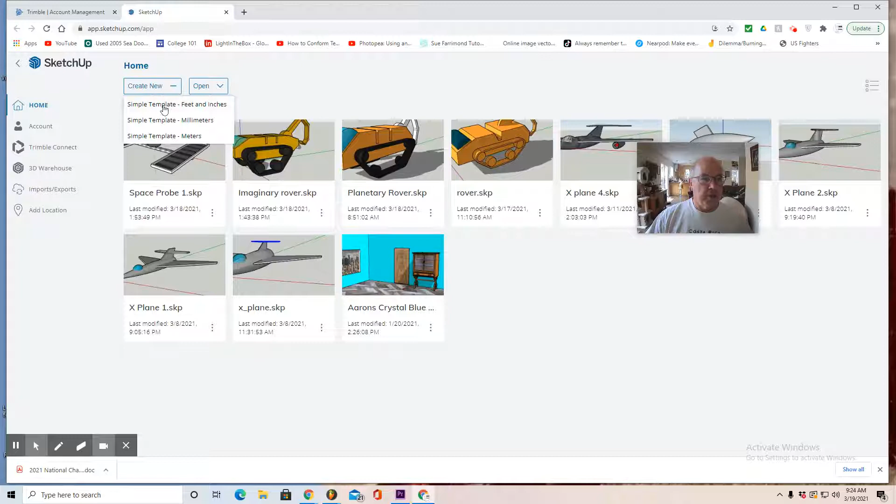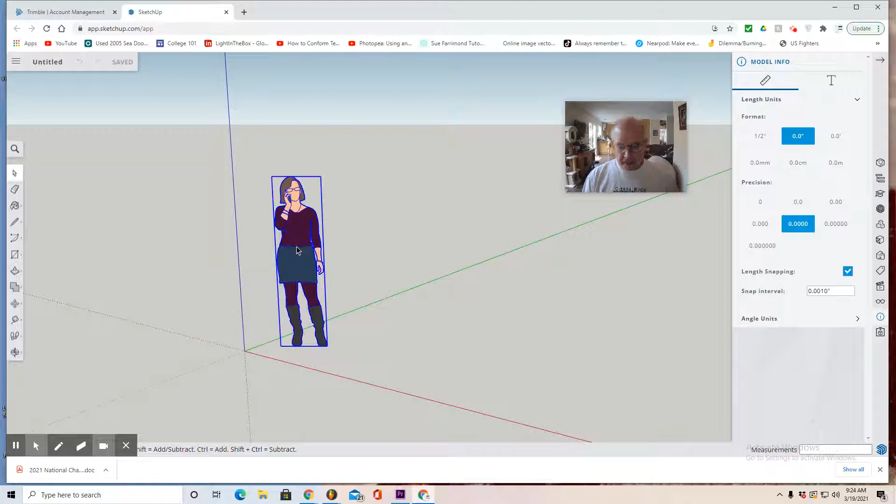Step 2, go to the I for model information and make sure you put it in decimals. Leave the precision as it is and change the snap interval to 0.001, then hit the enter key to lock it in. Select the 5'8" lady and hit the delete key on your keyboard to remove her.

Go to the scenes tab, looks like a movie clipboard. Put it in parallel projection to model, then put it in front view. Use the pan tool in the bottom left to grab that hand and pull it right here. Here's your origin, and then pull these axes down to the lower left.

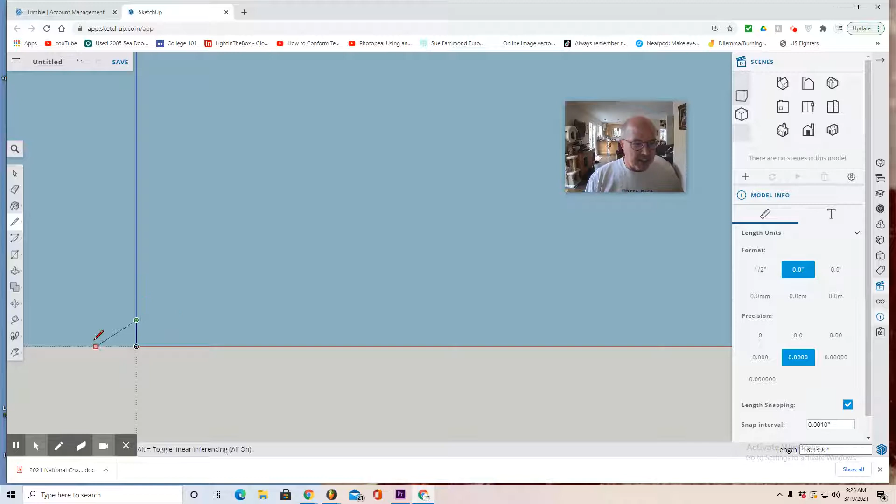I'm going to start with about a 10-inch central axis line. Looking down to length in the bottom right, I see my pencil still on the blue axis, so I'm just going to enter 10 on my keypad and hit enter. That locked in a 10-inch line. Use your mouse wheel to zoom and scroll in.

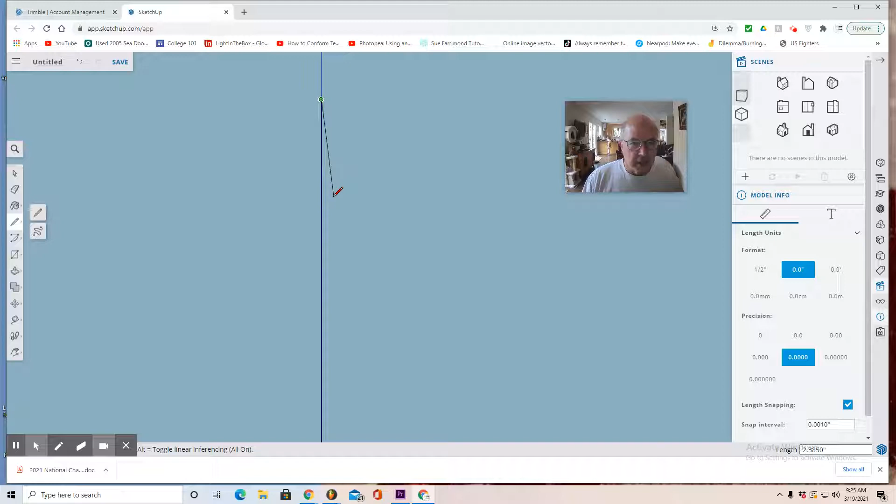Now I'm going to create my profile, adjusting it with the pan tool, then back to the line tool. Invariably, I use the double satellite dish. What I'm going to do is create a cone here, then hit escape.

Now I'm going to go to the arc tool, start here and pull my pencil up somewhere in this area, click, and pull an arc which will eventually become a satellite dish, then click. Now I'm going to try it again, but try to make it approximately parallel in nature, so I'll bring it here, click, and pull it here, click.

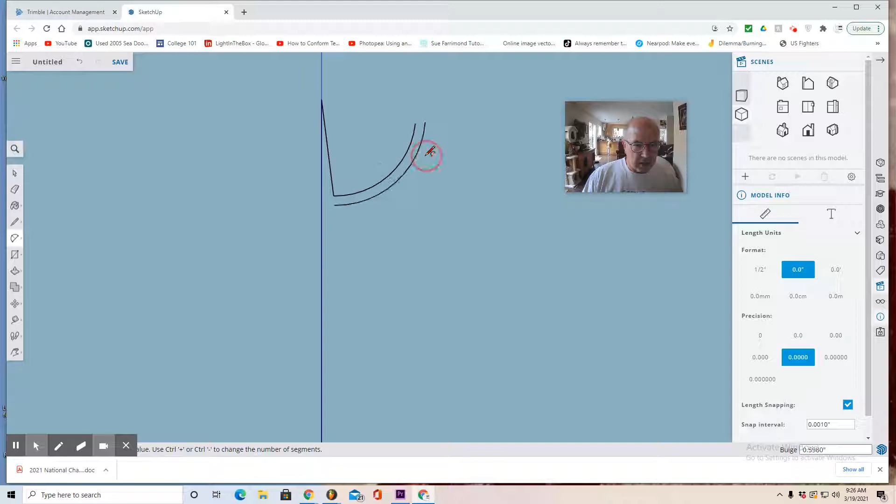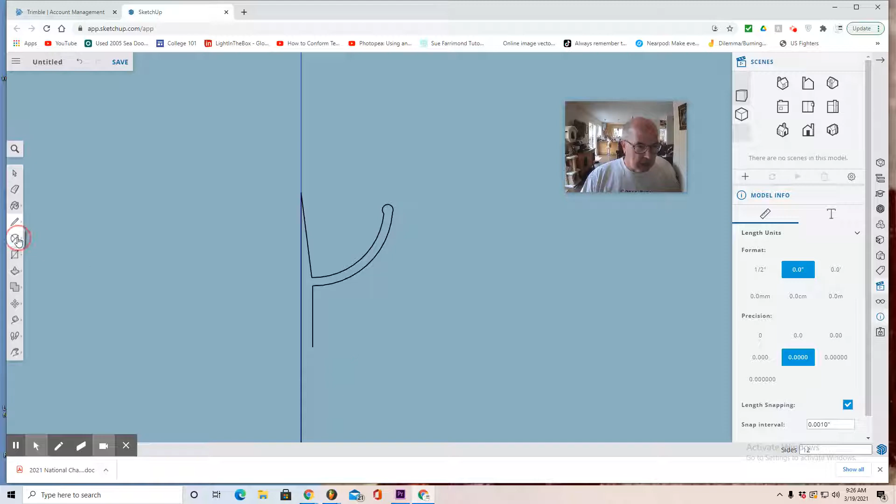For detail, let's zoom right in. I'm going to select here and make a bulbous detail shape. Now I'm going to use the line tool and move straight down, click a short little line, hit escape. Now I move to the arc tool yet again and make an even bigger disc.

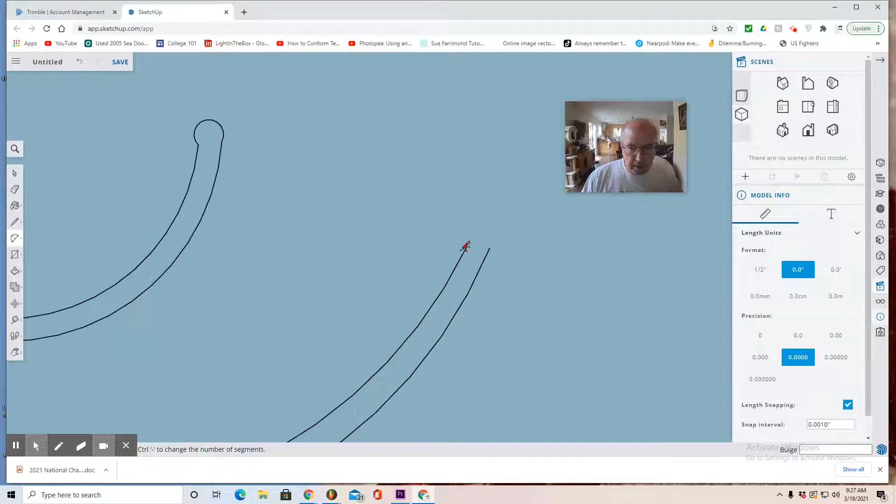So I'm going to make it just a little larger than the original satellite dish, and again pull a parallel arc. Then again zoom in, select once and select twice, and then pull and enlarge a bulbous shape.

Now I'm going to pan to see more. This is the main body structure, where all the electronic components will be stored in your satellite dish. You can add details as well, make it really nice if you add some little details inside.

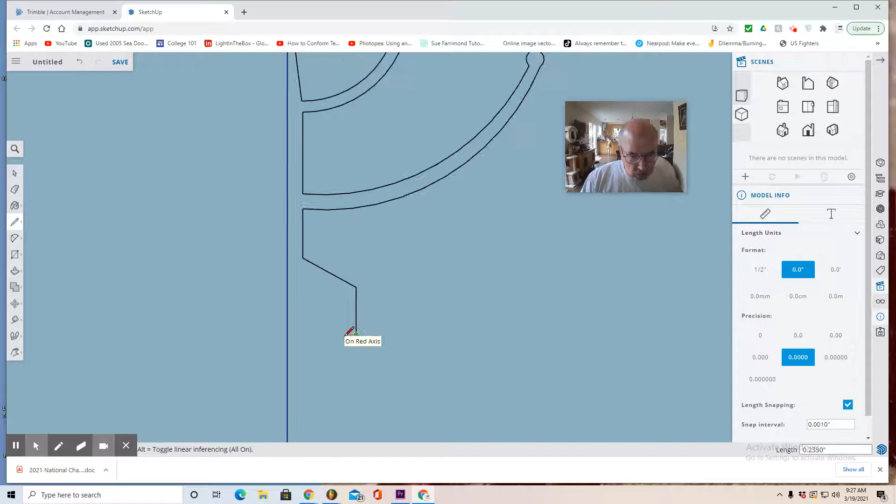Now, these are just imaginary, but remember, the concepts are real. In here, we have the electronic components. And remember, you can stop and pan at any time, then select the pencil again and return.

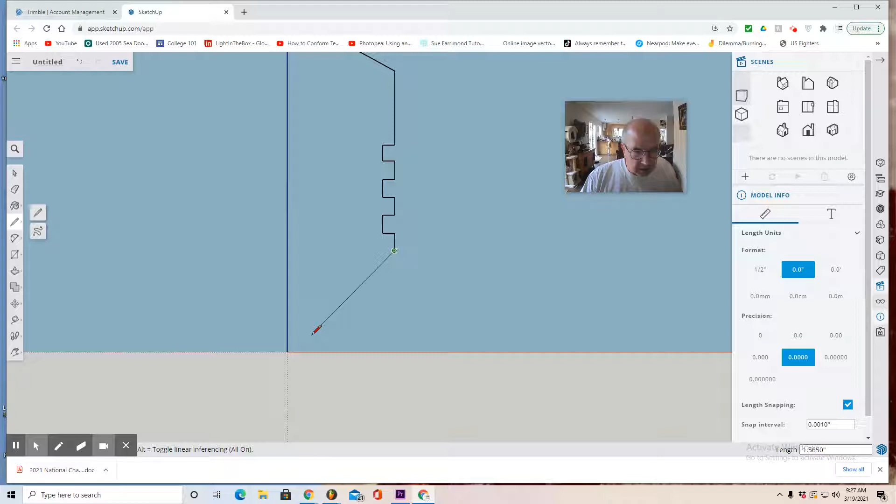I'm going to hit the escape key and try something a little different here. Maybe put an arc here to here. Who knows what this looks like? All right, so we got that.

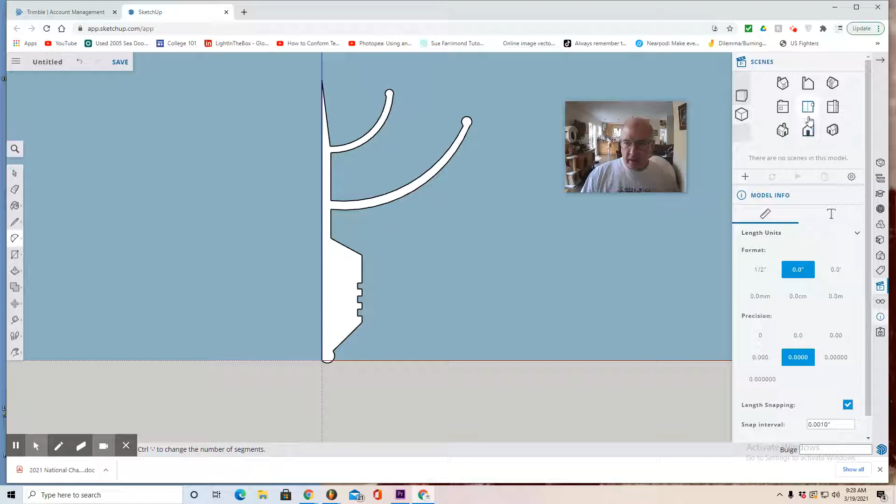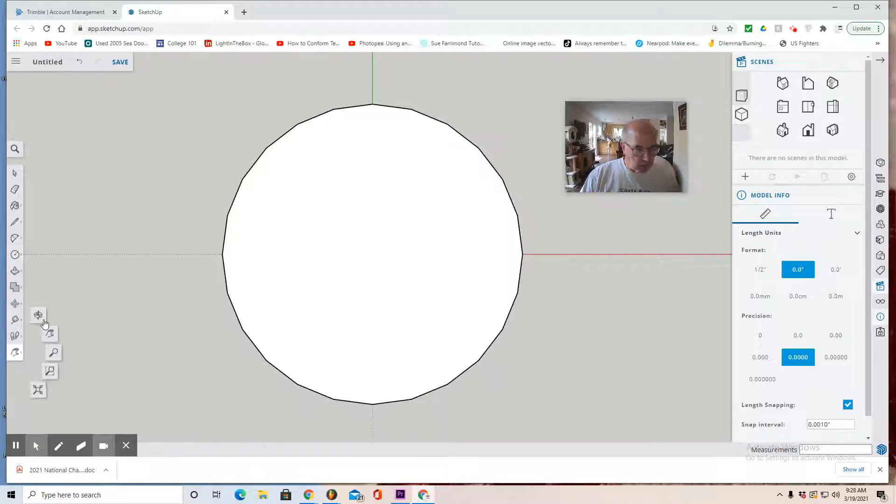Now that I've got the shape, I'm going to put it in top view. I believe top view would be nice, and make a circle. You can see my profile is slicing right through, and I'm going to use the circle to do a follow me process. Select here, select here, and then use the orbit tool to verify I did that correctly. As I can see, I believe I did that correctly.

Put it in front view if you so choose. Check it out, all right. So now I'm going to use the follow me tool. It's right under the push pull tool, the second tool down. First, you'll select your profile.

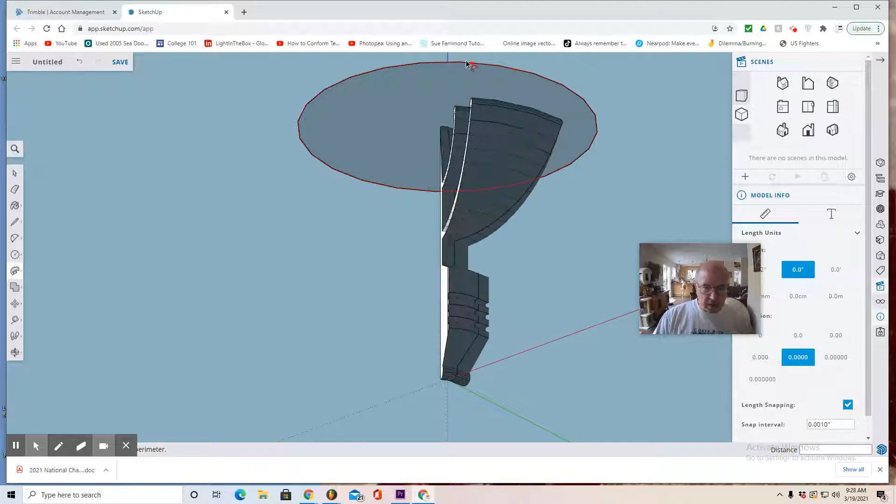In this case, I am going to pull it all the way around until I get back to here, and then click. And it worked out. Now, if it didn't work out perfectly, look, it doesn't seem like it did, so it actually is a nice little effect. Control Z though, I'm going to try it again. So again, click, and then up here.

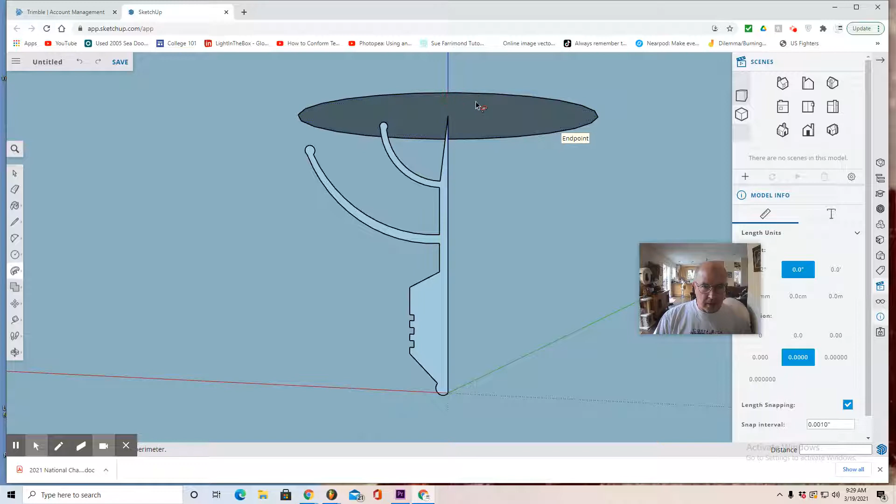Let's just reset the orbit a little. Follow me here. Again, bring it all the way around.

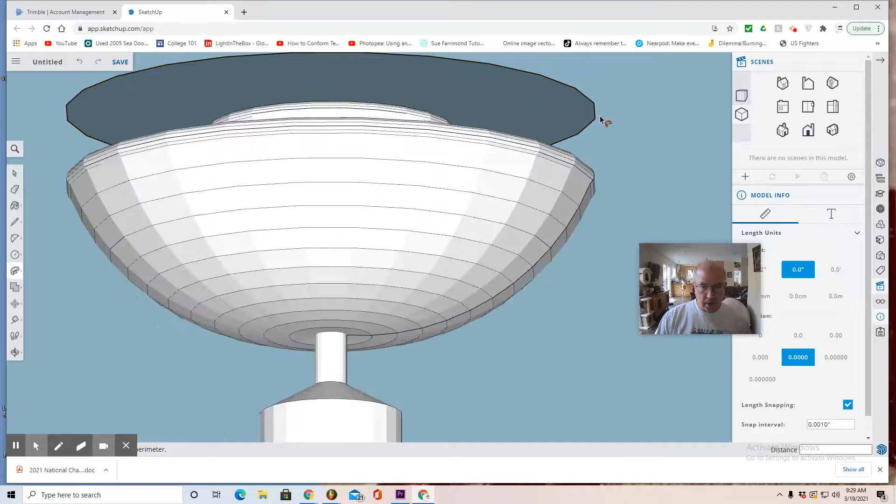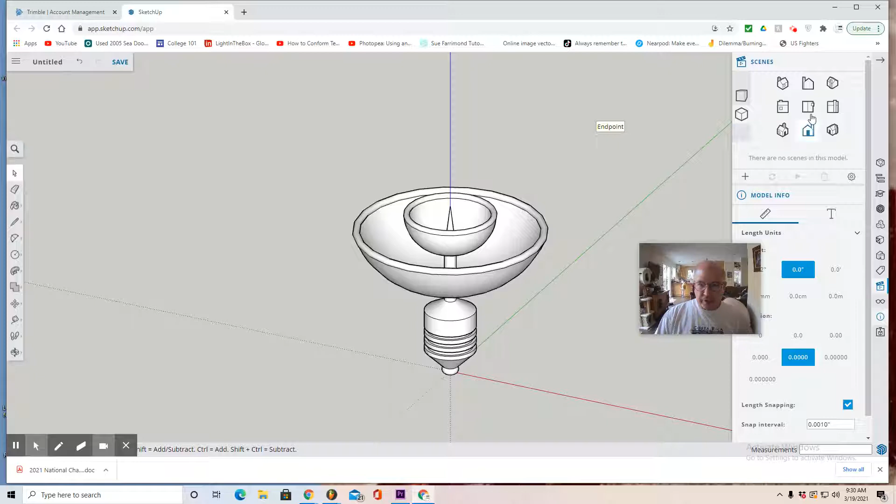I was able to successfully create a complete revolution. Now I'm going to select the disk and hit delete. So far, so good. That's the main body of my satellite.

The next step: put it in top view, zoom out, pan, and pull with the hand tool. Use the hand to pull way over to the right.

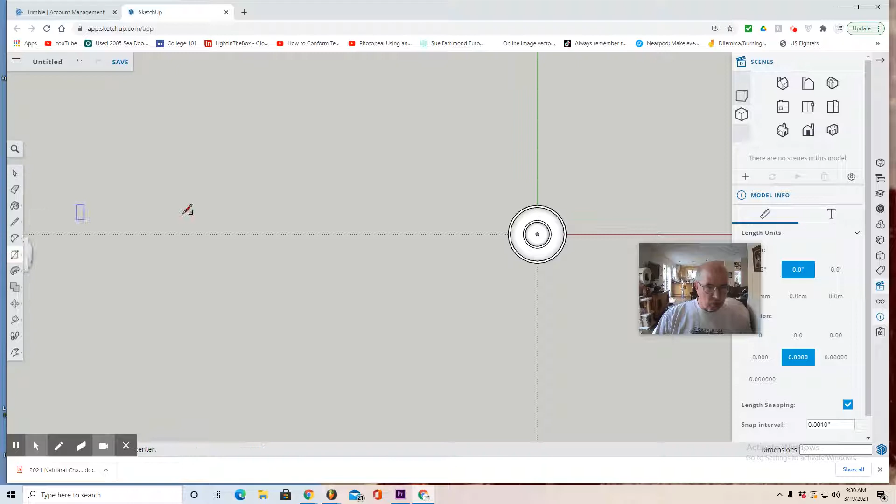Now I'm going to go to the rectangle tool and make my solar panels. Here's a solar panel. Click, and I'll make one that looks proportionally okay. Then you can use the orbit tool to push pull.

Just a thin shape, maybe 0.2. Enter. Okay, that's my solar panel. It's got to be lightweight.

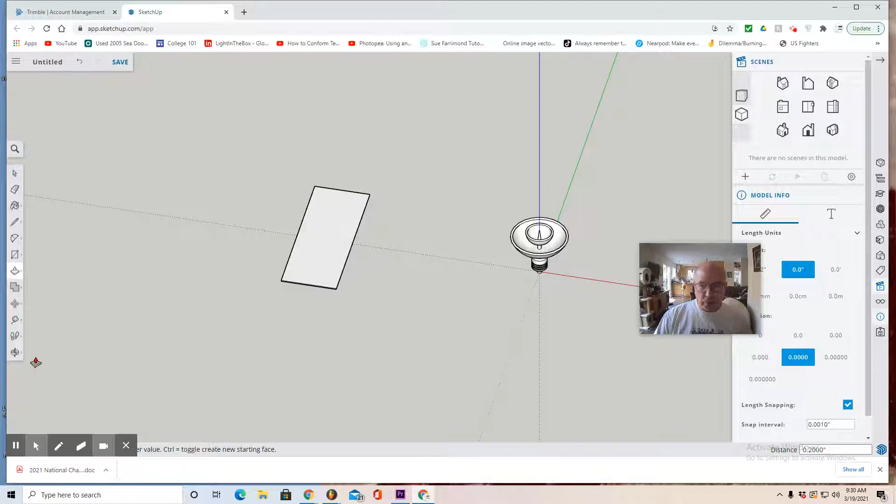Now here's an opportunity to use the offset tool that we used at the very beginning of the year. So I select my shape and press outward until I get approximately there. Now I'll use the push-pull tool again to grab this and pull it up a little bit, about 0.1. There, just a little detail.

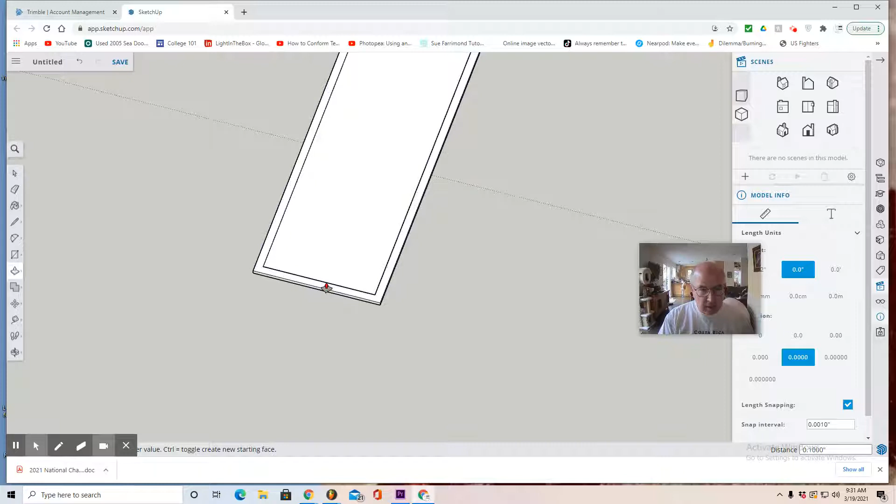Top view. The next step would be to copy the whole thing. Go Control C, Control V. You can use the pan tool and the move tool to move it onto the other side. Select this one and use the move tool to move it to this side.

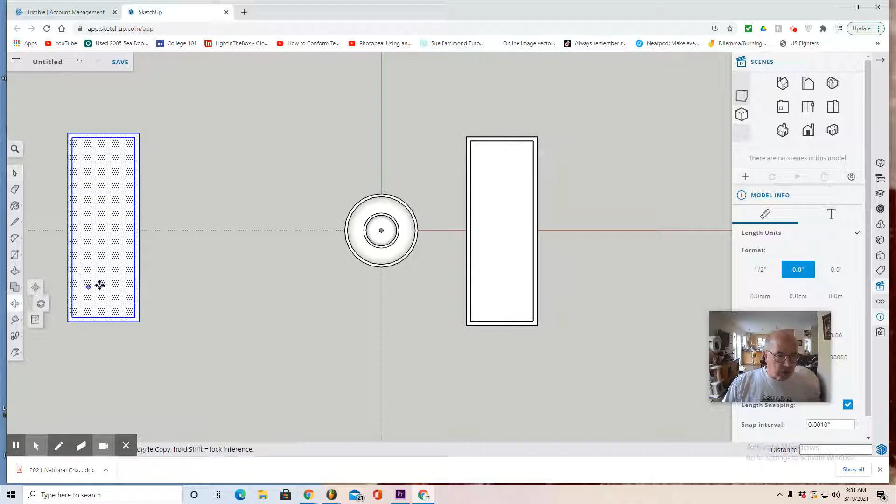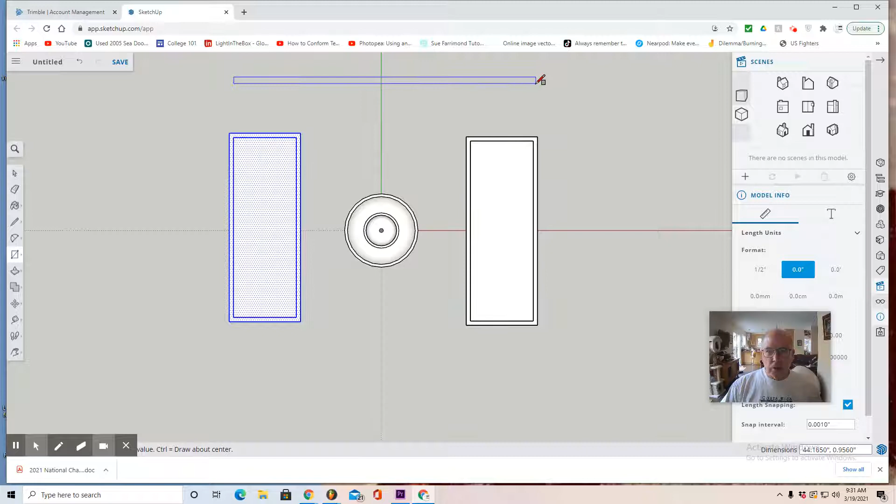One more component: again from the top view, make a rectangular bar. You can start here, just a thin rectangular bar. It's your world. Click, then use the pan or orbit tool and the push-pull tool to make a thin bar, maybe about 1 inch.

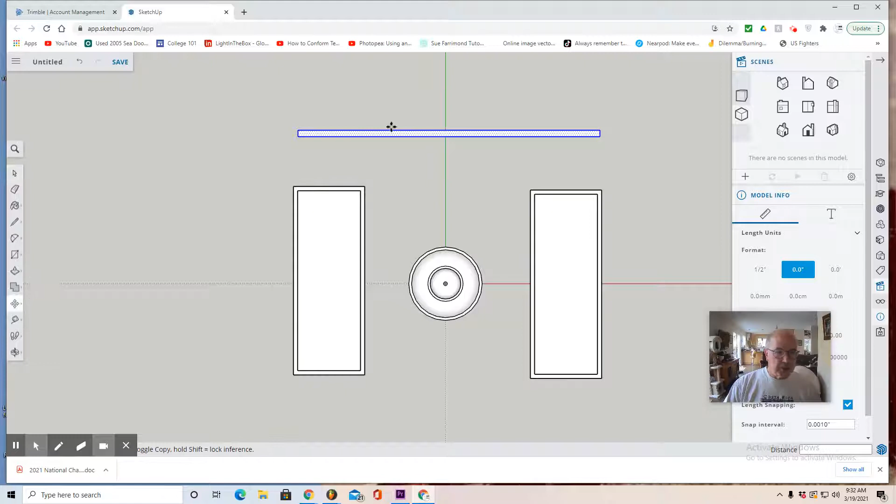Right, top view. Make sure you select it and move it into position. It goes right through the center of your satellite. Look at it from right view because it's not in the proper space.

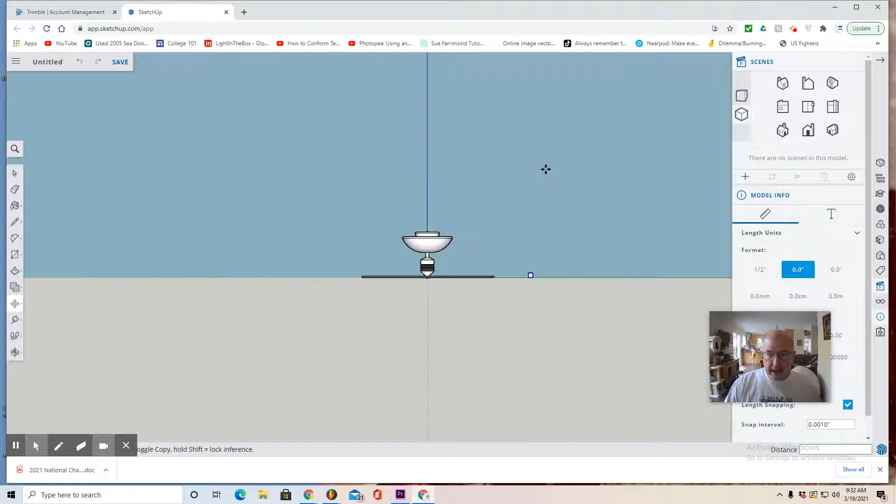Control Z, because I'm going to move it down first. Actually, I'm going to run it right through there, like so. That's where it goes, right there.

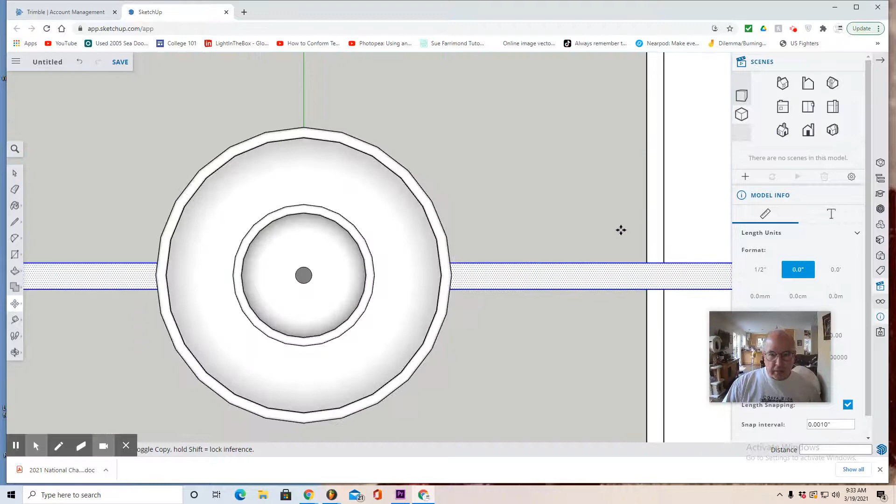Okay, top view, and now actually grab my panels. Make sure you grab them from the top. See if it's possible. Look at it from right view. Move it up. Doesn't work - Control Z. You have to look at it from front view to select it properly.

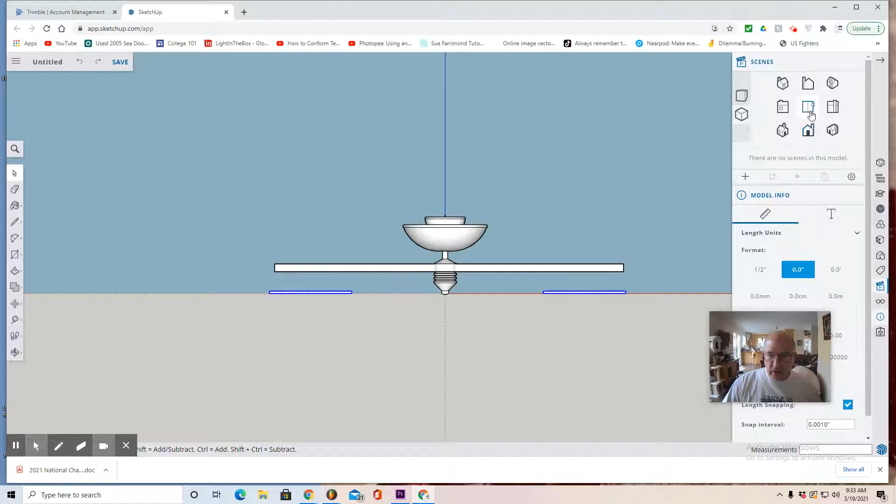Select it. Can you hold the shift key? Select this as well. Now you can look at it from front view. Let's see, top, front, right - try to find the appropriate view. Bring it up. There.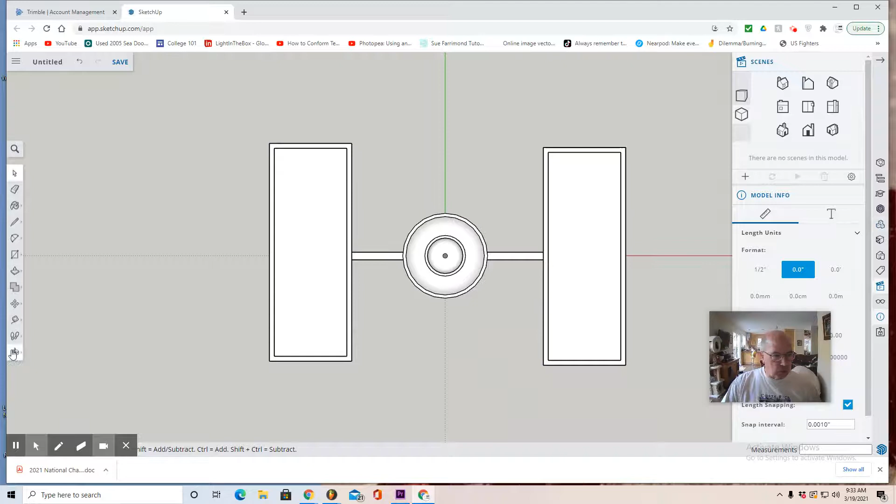Now it's all about discovering which materials look nice for carbon fiber and for solar panels. So step one, go to the materials list, look for colors, possibly metal, something with... ooh, could be solar - maybe this one. Yeah, maybe this. Just experiment.

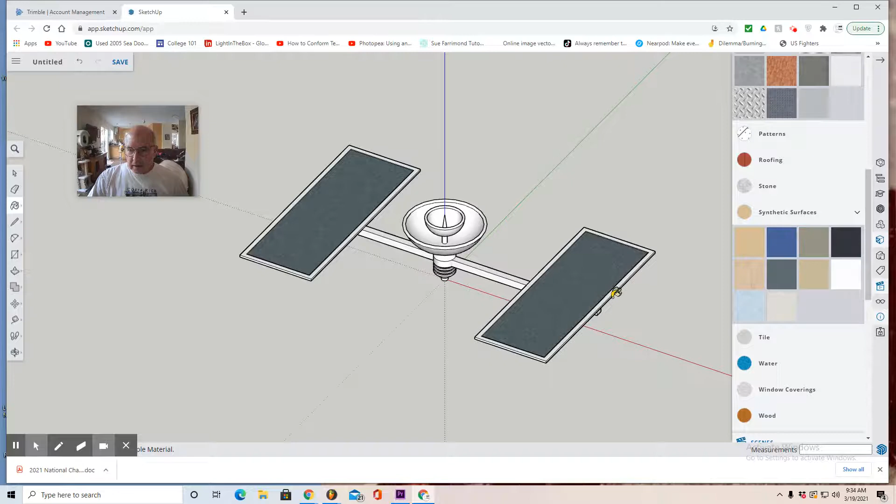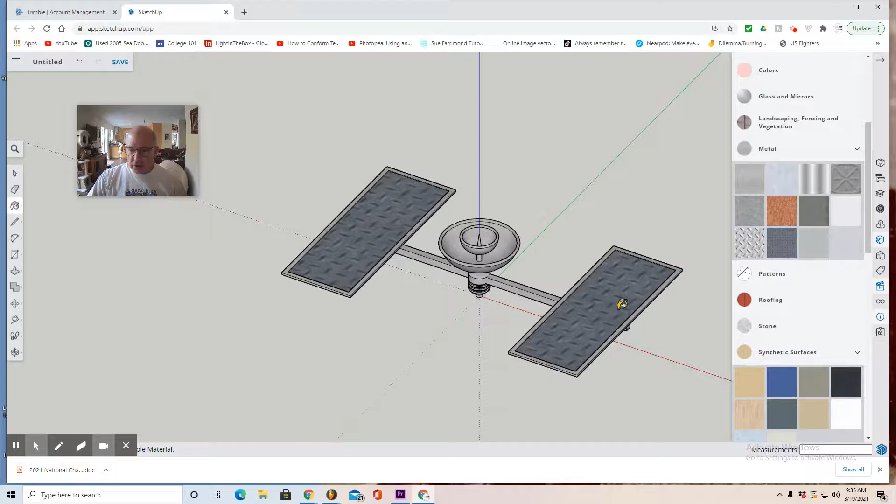So with that said, what I'd like to do is create the entire thing as a metal. I want to select the entire object. Now I'm going to go back to my solar panels and just select these two. Actually, just use this - there we go. That looks like a solar panel. Now to go to the final process.

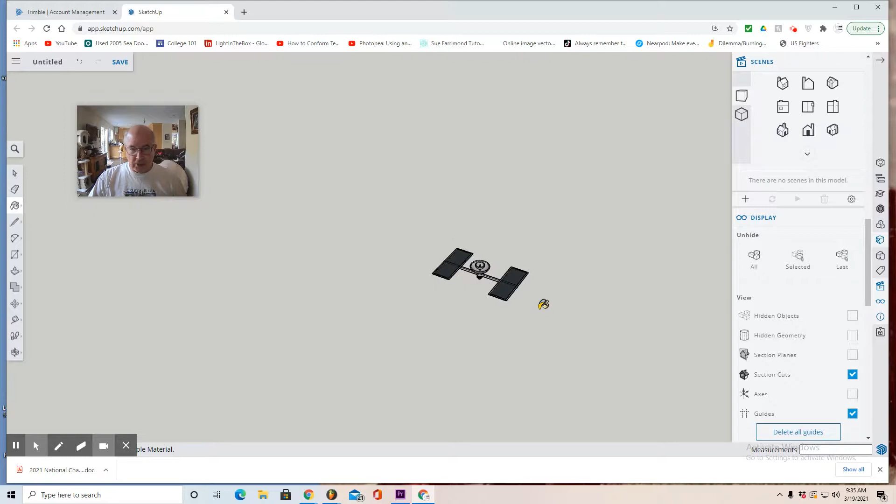Turn off the axes. There's no shadows on this because it's in space, but make sure you put it in perspective view. Return to the scenes tab, select perspective view. Don't get panicked, use the orbit and the pan tool. I like to zoom in.

If you would, please zoom in. You can orbit it just a little bit for effect. There we go. Now, save it.

Call it Space Probe. Save. Now it's saving - you can see it saving as Space Probe.

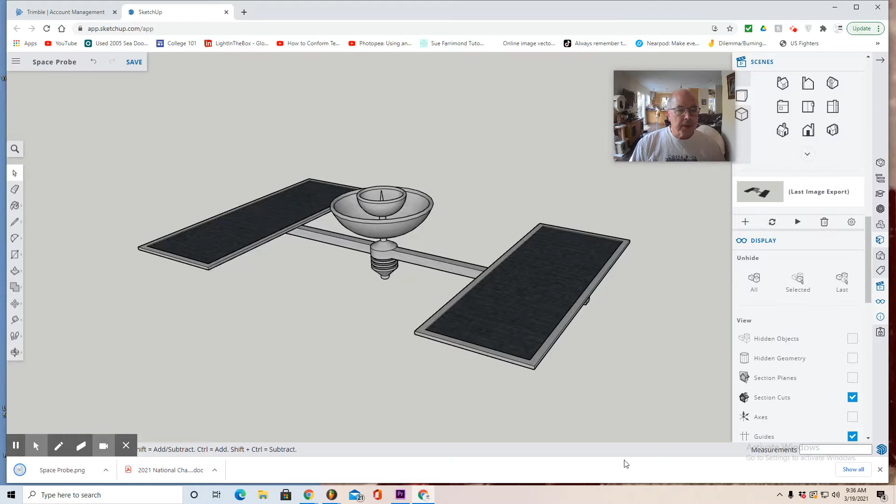When it's saved, go to the three lines in the upper left, export, PNG. Don't forget to select the blue button in the bottom right. You can see it went into my downloads folder. We can verify that that went into my downloads folder, and there it is. This is the image I want you to turn in for assignment credit. Good luck.